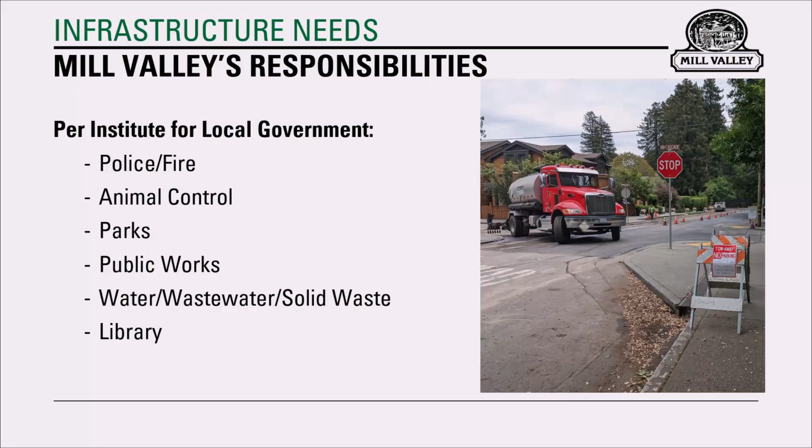Public safety is typically the most important thing that cities do, and this is often reflected in local government's budgets. I haven't looked recently, but typically fire and police make up somewhere in the vicinity of 40, 50, even 60% of a city's operations budget. If you ask the Institute for Local Government what it is local agencies are required to do, you'll see this list right here.

One simple example of this is, per California state law, when a road is repaved with a certain type of paving treatment, you're required to provide an upgrade to the accessible path of travel. What does this really mean? It means pedestrian ramps. When this rule was passed in the early 90s, costs for a typical pedestrian ramp were somewhere in the vicinity of $3,000 to $5,000 each.

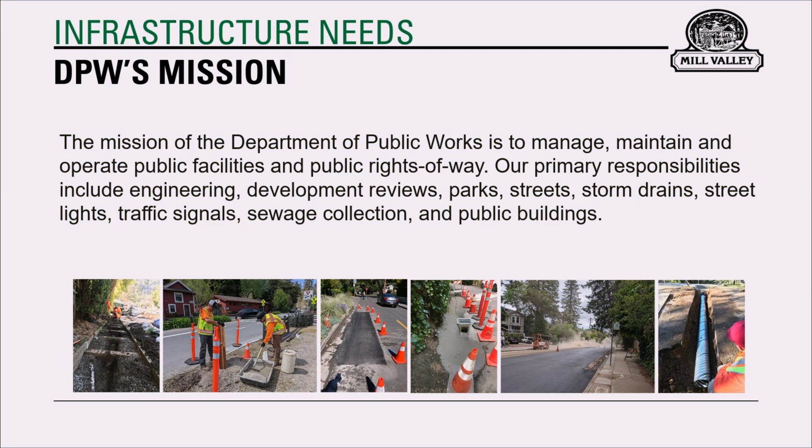This slide basically shows you some of the more detailed things that most citizens don't think about. This is not by any means a comprehensive list, but it's some of the things that your staff and council do think about. I want to assure you that why we're asking for your help is so that these things can continue to be maintained and their life extended. It's not just a one-time build a traffic signal and forget it, but it actually takes care, feeding, and so forth.

An example of this is the traffic signal at Sycamore Avenue and Camino Alto. There's been a traffic signal there for years. It outlived its useful life, and about 2 years ago, the city was able to get a grant fund and replace that traffic signal, providing an extended life, better safety, and visibility for our citizens and residents traversing that critical intersection.

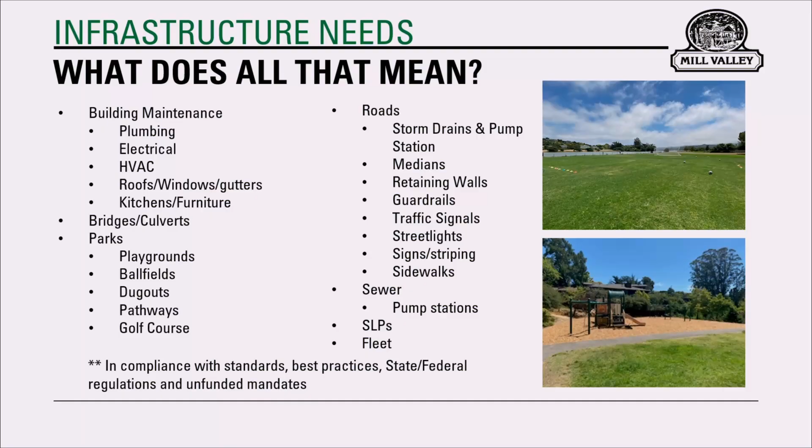So how much does all this cost? Well, to be completely transparent with you, this is a very difficult one for me. As an engineer, I like to be very accurate and precise. The reality is, at this point in time, it's not really feasible to put a fine point on a specific number. So we use a range here of need-to-haves, approximately $165 to $175 million.

You may notice, if you're paying attention closely or following along on this process, in September of 2023 a city staff report attachment had a long list of things that need to be done, various categories, whether buildings, roadways, fire, or veg management. If you added up all the ranges in there, it came to somewhere between $170 to $203 million. To be truthful with you, I think we need in excess of $220 million. But in reality, the point isn't exactly how much we need. The point is that there is a long list of things the city is responsible for, and they all take time, money, and effort to maintain and own.

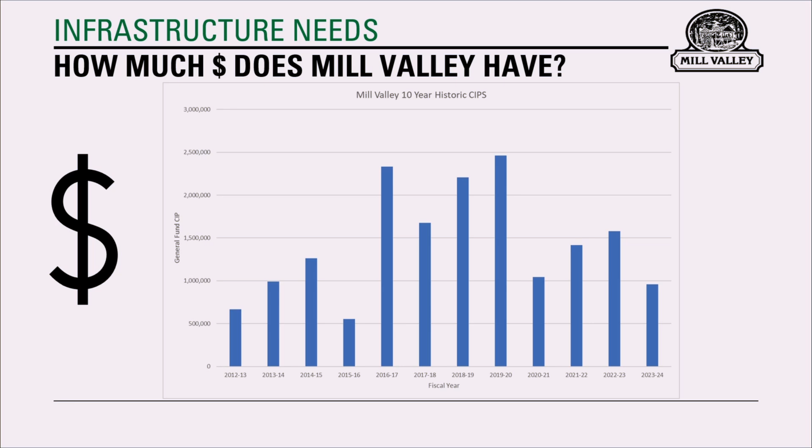Now, I certainly can agree that those projects were more expensive and took longer and more pain and suffering to implement than anyone would have preferred, but that is reality in working on a busy corridor or a busy downtown. And I thank the community for supporting the efforts, and I'm really glad we got through that.

So how does the city decide what's important? Well, in 2018 we adopted a process, and we said, you know what, we have a long list of projects. How do we really know what is the most important thing to do? So we adopted a matrix that's similar to what other agencies use, and it really focuses on the important things, such as health and safety.

Is it a legal mandate? Is it something that the city council adopted as a policy, and so forth?

So the CIP selection process that we adopted in 2018 is something that city staff took very seriously, and it involved all stakeholders. We reached out to the various commissions, such as Park and Recreation, Bicycle and Pedestrian Advisory Committee, the Emergency Preparedness Committee, and we sought input from them on what projects they want to do.

The various departments, whether it was the library, the police department, the fire department, they completed basically what we call applications for funding. Here's a sample of one right here. These applications for funding are very simple.

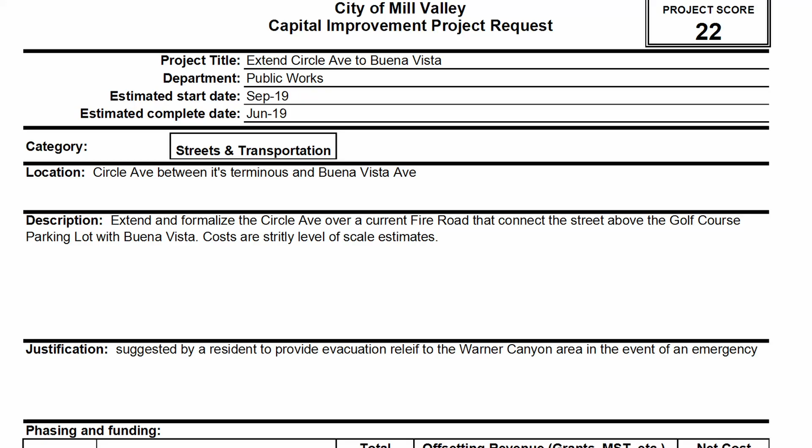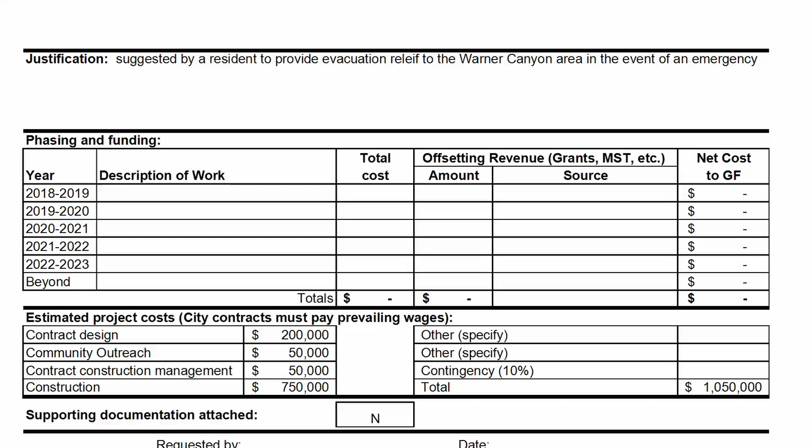They list the project name, what category it goes to, what it actually includes, some cost estimating for it, and then it automatically calculates some project scores based on whether it does meet council priorities, whether it's funded by others, whether it's a legal mandate, and what the purpose of the project is.

The spreadsheet then goes ahead and creates a total score for this, and then that total score is ranked in comparison to all the other projects.

Now, I do want to let you know, to be transparent, this is not something that we've formally gone through during the last budget cycle, because quite frankly, it's a huge effort. It takes hundreds, if not thousands, of staff hours to put this together. And the reality is that we already know we don't have enough money to do everything we need.

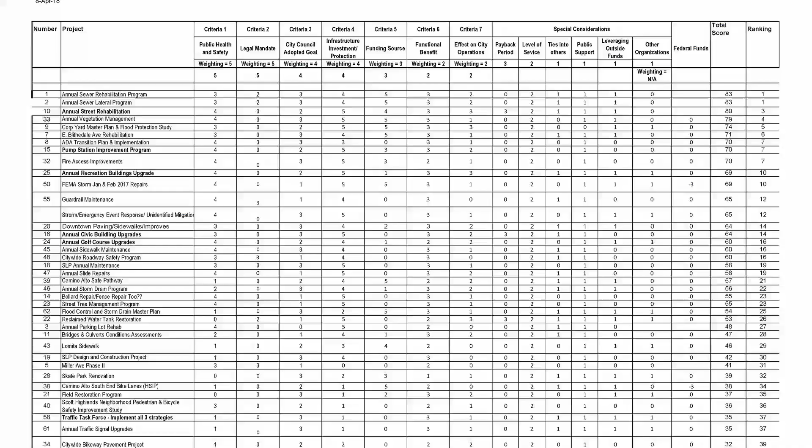So, in following this process, the next attachment I have here is this CIP scoring matrix. We took all these spreadsheets and put it into another scoring matrix. If you take a look at this scoring matrix, the projects' names are over on the left-hand side. The criteria and score given for each one of those is given throughout the matrix. There's some special considerations given for extra points. And then a total score is calculated on the right, and these are sorted by ranking.

Not surprisingly, health and safety things come up as the most important things to get funded, such as our annual sewer projects, annual street rehab project, vegetation management, the corporation yard master plan and replacement, some flooding things, East Blithedale, and ADA compliance.

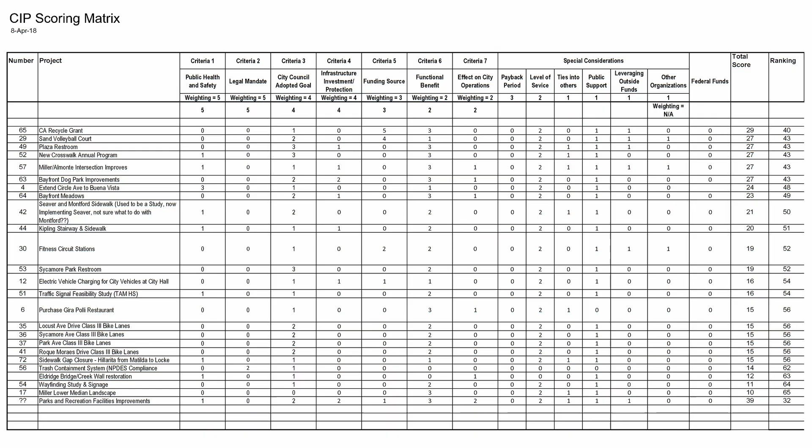These are important things that we must comply with and move forward with to help protect our citizens. As I mentioned earlier, City Council was very supportive in the 2018-19 timeframe, and still is, and we were able to get funding for a series of studies.

You'll also see a roof replacement for around $600,000 a little bit further down. The building is about 20 years old. These things last about 15 to 20 years, and we need to proactively plan and repair them before there's an issue. An example would be the leaks at this particular roof replacement for the community center.

I think we've learned our lesson from the library, which is a beautiful building, but for many years it had leak issues, and of course that's a problem when you have water going into books. Luckily that was taken care of a few years ago now, but the library has a special roof with special redwood shingling that has costs associated with it.

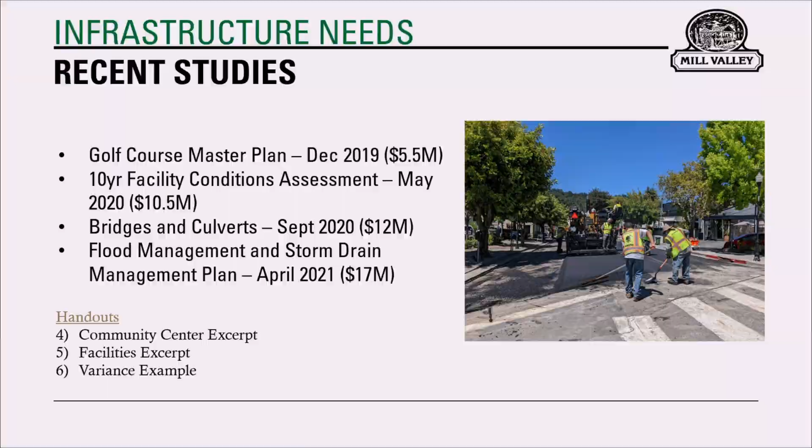The next handout, what we called handout 6, is titled City Facilities Assessment. The key takeaway is on the left — it has each facility, and for each fiscal year there's an EMG price estimate and a TBD estimate for each one. I want to point out that the variances throughout the years go from 17.6% at the bottom to 62% to 23.6%.

These are large swings and large cost issues. Overall, if you look at the far right, you'll see that EMG estimates there's about $14.6 million worth of facility needs, while TBD includes about $18.6 million worth of needs. Those are large numbers. I should also point out that at the time we did this study, this includes five buildings, but it does not include the community center.

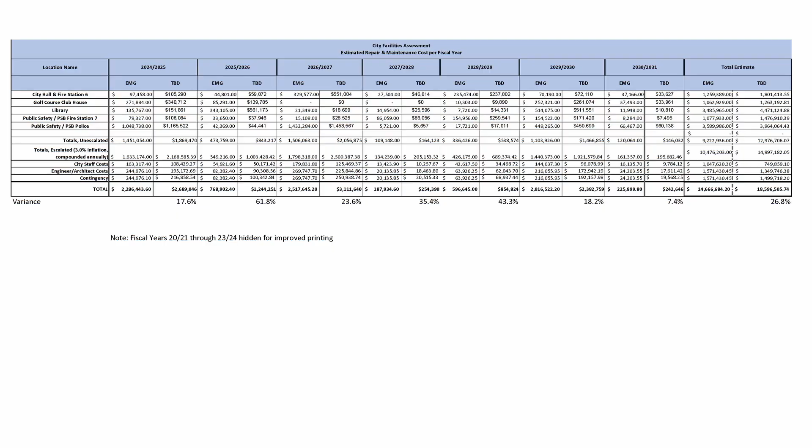The thinking at the time when we started this was the community center was only 15 years old — it wasn't that urgent to do it. In retrospect, that was a mistake, but luckily we have good community center staff watching out for the buildings and trying to protect the city's assets. We do have a list and some total dollars for that.

Another study that was done is bridges and culverts. And I have to fess up — many people ask me throughout my time here what are the things that have you worried, what is it that you're actually concerned about with the city of Mill Valley? My top three are always staffing — do we have the right people in the right place, the right training and knowledge, seeing the big picture while focusing on details. That's a continual study in any business.

I will mention, for sure in maintenance and engineering, it's really hard to find qualified people, so we're very lucky here in the city of Mill Valley.

The second one is sewer lines. Sewer lines are just one of those things you don't want anything to go wrong with, and I can't help but be nervous that at some point one of our 6-inch sewer mains that goes under some road somewhere is going to burst, and we're going to be on the news with an overflowing spout of raw sewage flowing somewhere. Hopefully that's not going to happen, but that's a natural fear of mine.

The next one — I'm always worried about those winter storms. There's just so much that could go wrong, whether it's flooding, trees getting knocked over, or landslides. We're susceptible; we live in an area with wide weather patterns — we go from drought to too much rain, and the too much rain is very heavy on our tree roots and our slopes. We just don't know what's going to happen. We prepare as best we can, and we inspect our facilities and so forth, but naturally any of us who care about what's going on here in Mill Valley are concerned about that.

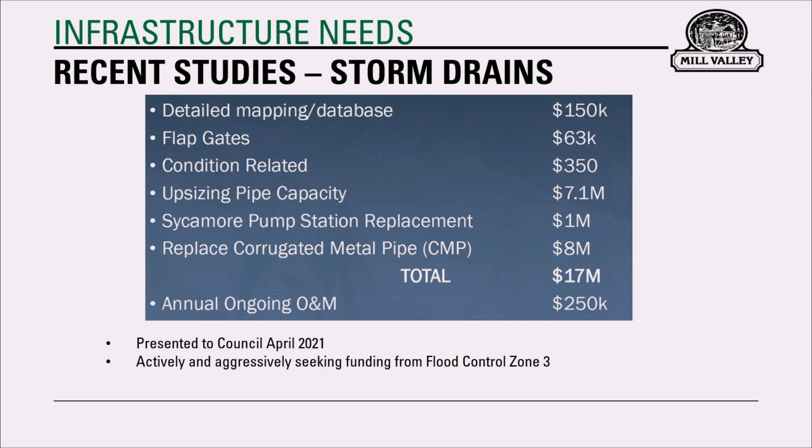Mill Valley contributes a share to it, and then the Flood Control Zone manages, oversees, and funds some Mill Valley projects, but some projects go to other agencies as well. So that's something we're working with county staff on.

The typical project that folks are most aware of that Public Works does is streets, so I've got a slide here on paving. Thank you very much to the community and to council who supported what we call our municipal service tax years ago. It's been adopted twice, most recently I think in 2016, and it was set such that the city could improve and dedicate funding towards roadways and vegetation management, fire access, egress, and safety projects.

So not to bore you too much, but there is a regional measure called PCI, which stands for Pavement Condition Index. There are goals that City Council has established, and we study it every couple years. Depending how much money you spend, you can improve your roadways a certain amount.

Very happy to report the City of Mill Valley has the third highest rated roadway system in Marin County, with the two ahead of us being agencies that are pretty small and don't have as much wear and tear on their roads or as much roadway to maintain. So this is a great accomplishment.

I will also say, no matter how high our PCI is, I can attest firsthand that folks are going to call and say the roads aren't in good shape. Yes, it's great that you paved Miller Ave for around $18 million, Camino Alto for $2 or $3 million, Blithedale for around $12 million, but the road in front of my house is in bad shape. What are you going to do? When are you going to get to it?

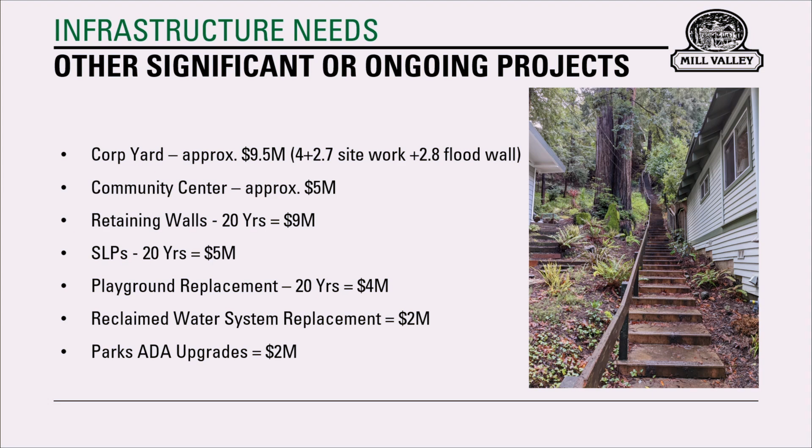I showed it on previous screens, but I didn't really talk about it. There are also things that are considered quality of life issues. So certainly the must-haves include roadways, fire, police. Quality of life issues, which is a council priority, by the way, are things like parks and ball fields, and these are things that we want to implement, but there quite simply isn't necessarily money to implement.

So a particular thing that jumps out right now, because it just came up at the Park and Rec annual retreat, is the volleyball court. The city's Park and Rec department, with some community volunteers, have applied for a grant and have raised some funds, so hopefully that's something we can implement. But there are, of course, issues with permits, where it goes, approval, who's implementing, what it takes to do it. So we're going to work through those, but this is just an example of things that we want to do.

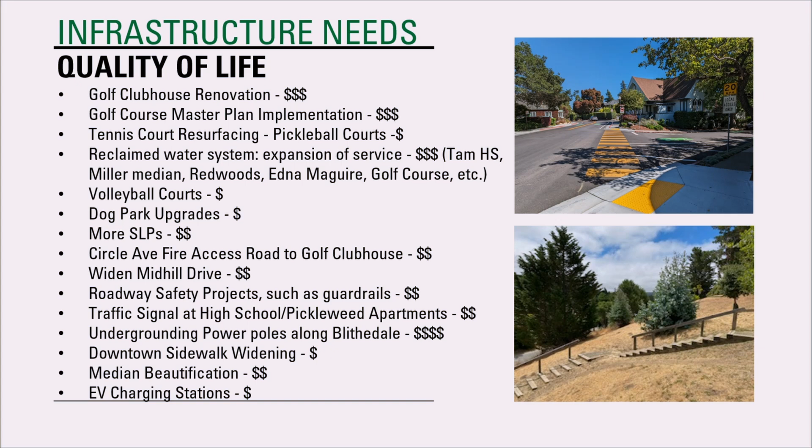And quite simply, the things with a single dollar sign on the right-hand side are kind of lower cost, and higher cost issues are $4 signs or $3 signs. This is just kind of a tracking of things that we are aware of, and we do want to go ahead and work on. What does this equate to?

Well, generally, the must-haves are around $165 to $175 million. The quality of life issues are in the $25 to $35 million range. We absolutely have to reiterate that these are large dollar amounts with large dollar swings, and we can't predict how much things are going to cost even this summer, let alone 3, 5, or 7 years from now, with any certainty. So we call this rough order of magnitude.

One thing I do want to point out, I went back and shared with you that we get an average of $1.5 million a year approximately. Being an engineer, I want to be accurate, and I want to say, how long is that going to take for us to get to our current needs? Well, that's 133 years. Our facilities need more maintenance and operation support than waiting 133 years before they can be rehabilitated.

Lastly, on this particular slide, I want to share with you the pictures, and you probably recognize them now. This is our beloved Hauke Park bridge, pedestrian and bicycle bridge, and it is a heavily used bridge. It provides access to the multi-use path, to the school, to the fields.

Well, a couple Novembers ago, and I know it's November because it involved the November break activity, some joggers were running over the bridge, and they called city staff and said, 'Hey, I noticed your bridge is kind of bouncier than usual. I don't know if anything's wrong, but I'd like to report it to you.' Thank goodness they did. Staff went ahead and inspected it, and sure enough, we saw these piling right here had rotted.

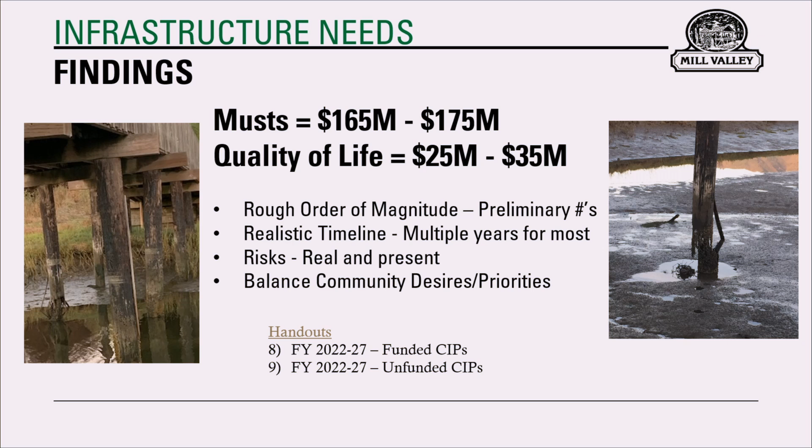This created an emergency project. You can see on the left how far it was split, and on the right how far it was split. We had lost 2 of the posts. It's something that wasn't on staff's radar, wasn't in a rehab program, and wasn't caught on the bridge and culvert study of 4 or 5 years ago. It actually precipitated the bridge and culvert study, to be fair to the consultant that provided that study. But it's an example of things that come up.

So city staff was quickly able to rehabilitate this, get a contractor on board, get a structural engineer on board, and communicate with the school. But of course, it caused a lot of headaches.

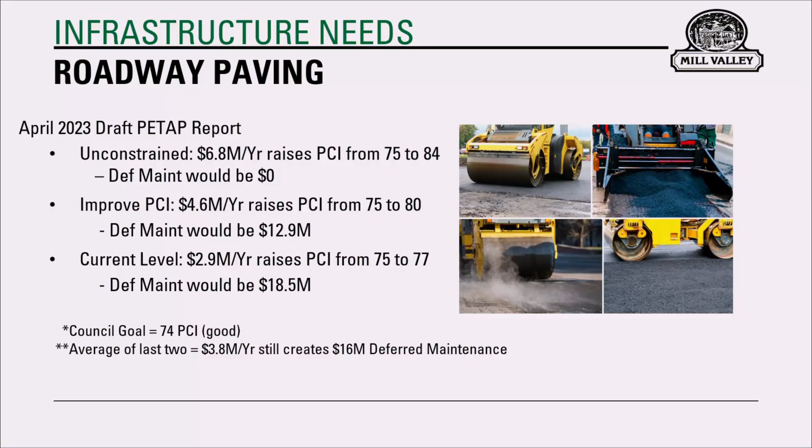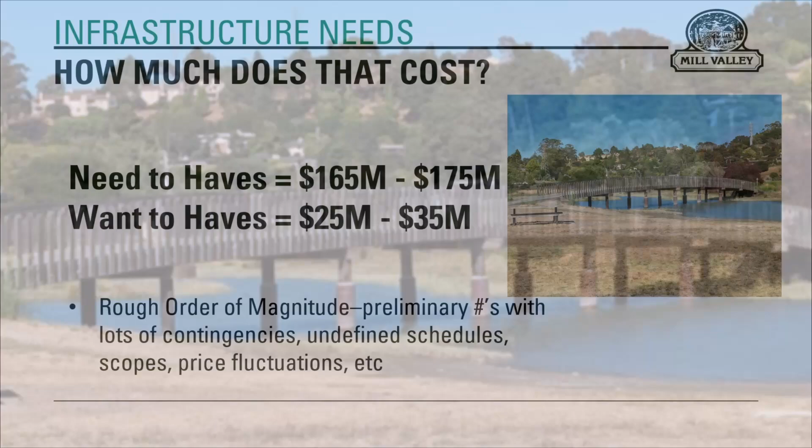So we mentioned that there was an advisory panel to council last late summer and fall. As part of that panel, there were a number of subcommittees involved with putting these recommendations together, and I was working with the infrastructure subcommittee and funding subcommittee. They helped me put together this presentation. What was important to them? How could I break this down to laymen? Here is a handful of questions they asked on my first draft of the presentation. Rather than building it into individual slides, I thought it would be most efficient to share these questions with you, as I expect you'd have similar questions to what those other citizen volunteers did. First question, I'll go through these as quickly as I can.